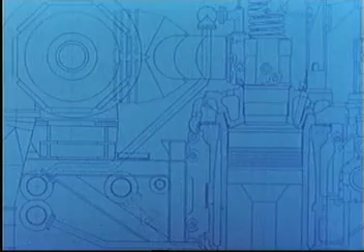The diesel engine propels half the tonnage of all the world's shipping.

Given good care, the diesel engine provides a maximum of effect on a minimum of oil consumption. The engineer will see to that. At the moment, he's checking the temperatures of exhaust and cooling water.

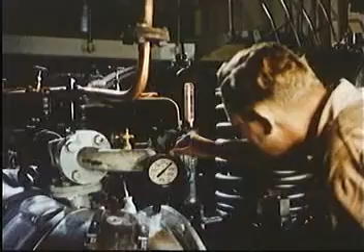His routine inspection takes him further down to the second platform with the intercoolers for charging air.

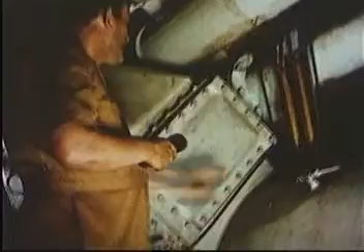Now he reaches the bottom, where his flashlight reveals the return piston cooling oil behind the sight glasses.

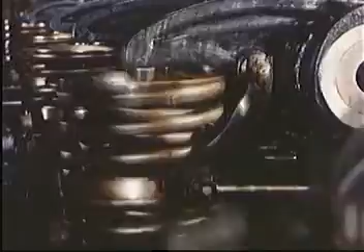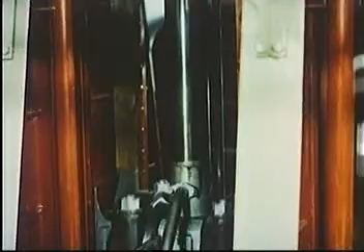To make a further study of the diesel engine, we leave the engineer and his instruments and put sight glasses on the engine from top to bottom. This reveals the movable parts: pistons, piston rods, crossheads, and connecting rod and crankshaft.

This sectional view shows the function which the most important parts of the engine have to perform.

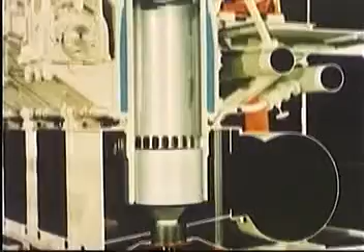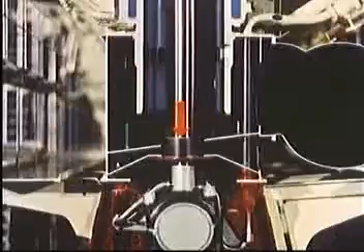In the upper part of the cylinder, an amount of fuel oil is burnt, which causes the temperature, and thereby the pressure, to rise in the combustion space. The gas pressure acts on the piston, from which the force is transmitted through piston rod and crosshead to the connecting rod, and results in a torque. The thermal energy has been converted into mechanical energy.

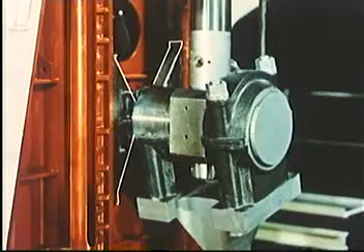In an arbitrary piston position during the working stroke, the crosshead is exposed to a vertical force from the piston rod and a force in the direction of the connecting rod, which together result in a horizontal force. This horizontal force must be transmitted to the engine frame, and for this purpose, the crosshead is provided with slide shoes supported on vertical surfaces, the guide faces on the engine frame.

Powerful forces are at work in a big marine engine, and accordingly, the engine parts are of big dimensions. In the workshop, with people providing a natural yardstick, one receives a good impression of their size. So big must the crosshead slide shoes be in order to transmit the horizontal forces.

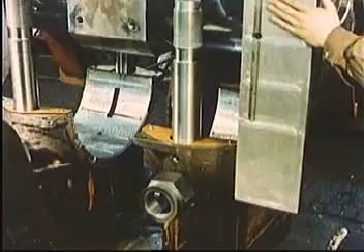The high points in the connecting rod bearing, which have been spotted by the contact with the crosshead pin, are scraped off in thin chips.

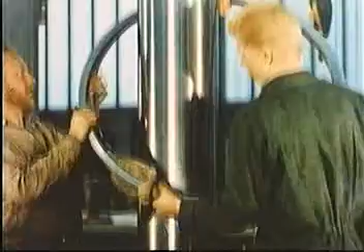To provide tightness against the high pressures, the piston is fitted with piston rings. The ring is fitted by a special tool which imparts an evenly distributed bending moment to it, thus preventing the danger of a permanent deformation.

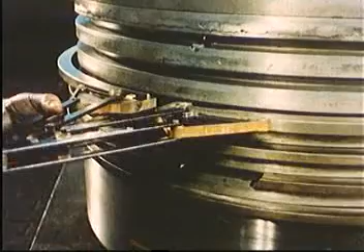The cylinders are not easily overlooked either. The scavenge air ports are bored oblique to a diametral plane to set the scavenge air in rotation.

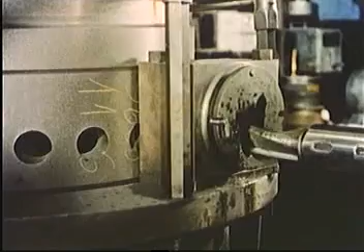The crankshaft is so big that to facilitate manufacture and installation, it's made in two halves, which are bolted together later. Each half is built up from a number of individual parts: main bearing journals, crank webs, and crank pins. The crank webs are provided with counterweights.

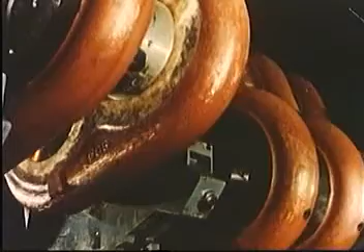Let's look a little closer at the principle on which a two-stroke engine works. Fresh air is supplied by a blower. From the blower, it's conducted in a pipe along the engine to the scavenge air space around the cylinder.

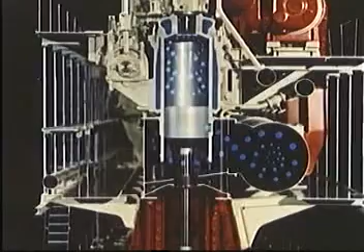When the piston approaches the end of the downstroke, the exhaust valve opens, the scavenge air ports are uncovered, and fresh air flows up through the cylinder. Exhaust valve and scavenge air ports are then closed, and during compression, the air is heated for ignition of the injected fuel.

The combustion increases the temperature and thereby the pressure which drives the piston. The exhaust valve opens, the pressure falls, and the combustion products are expelled. The air is again compressed. Fuel is injected, ignited. The gases expand. The exhaust valve opens, then the scavenge air ports. The cylinder is scavenged, and the cycle is repeated.

The power developed by an engine depends on the pressure events in the cylinder. The pressure events can be recorded by means of an indicator connected to an outlet from the combustion space.

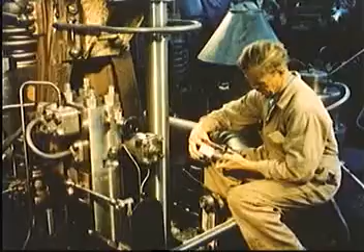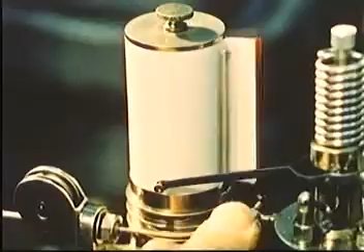The pencil is now moving in time with the pressure variations inside the cylinder. The drum carrying the paper is connected to the drive from the engine piston, its motion proportionate to the piston motion. The pencil records the pressure events during an engine cycle.

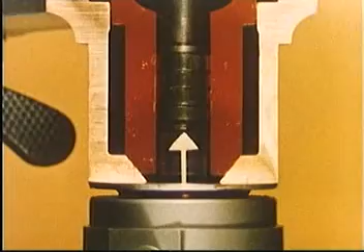The construction of the indicator is simple. Through a duct, the gas pressure is transmitted from the combustion space and acts on the indicator piston moving inside a small cylinder. The motion is resisted by a spring. This spring is exchangeable so that it may be adjusted to different pressure ranges.

The motion is communicated to a lever at the point of which a pencil is fastened. The pencil is pressed against a drum moving back and forth with the up and down motion of the engine piston. Thus, a curve is traced which shows the relation between the gas pressure in the engine cylinder and the position of the piston.

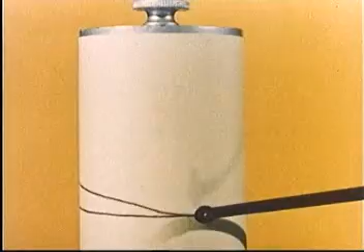The output of an engine is dependent upon the relation between pressure and volume in the cylinders during compression, combustion, and expansion.

For each separate cylinder, the indicator traces a curve, the so-called PV diagram. The diagram shows that the pressure is almost equal to the scavenge air pressure when the scavenge ports are uncovered.

The exhaust valve and scavenge ports are then closed. The air is compressed, and when the fuel is injected and ignited, the pressure will rise rapidly and remain at maximum during continued injection. After injection, the pressure in the cylinder falls to exhaust pressure, and during the exhaust period to scavenge air pressure.

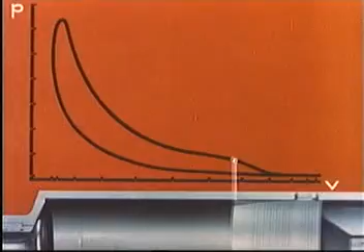Scavenging, compression, combustion, expansion, exhaust, and back to scavenging.

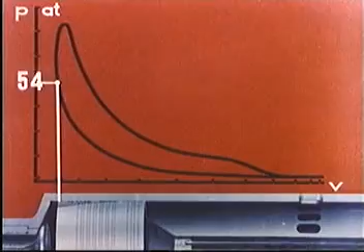The characteristic pressures are approximately a compression pressure of 54 kilograms per square centimeter, maximum pressure 66, exhaust pressure 8, and scavenge air pressure 1.75 kilograms per square centimeter.

From the indicator diagram, the indicated output may now be computed. At an arbitrary position of the piston during the compression stroke, there is a certain pressure, P, acting on the piston top. If the piston travels a short distance further, corresponding to delta V, and if we ignore the minimal change in pressure, the amount of work done, delta A, will be given by the pressure multiplied by the change in volume, or P times delta V.

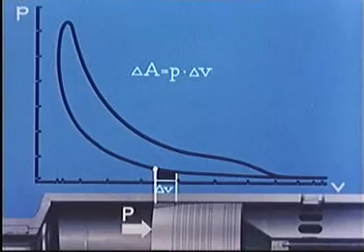This work is represented by the area below the part of the compression line corresponding to delta V, and the same applies to every single part of the compression curve. That is to say that the whole area below the compression line represents all the work that the piston must perform to compress the air in the cylinder.

During the expansion, the piston pressure acts in the same direction as the piston is moving, so therefore the piston receives an amount of work, and it will be seen in the same manner as before that the amount of work received is represented by the area below the expansion curve.

The amount of work transmitted to the piston during a full engine revolution must therefore be the difference between that delivered during the compression and that received during the expansion. In other words, it is given by the area between the curves. Thus, A equals sigma P multiplied by delta V.

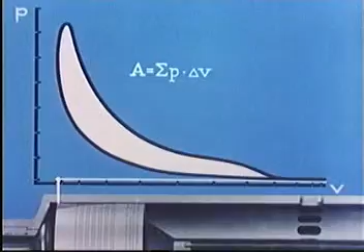One could imagine the same area being produced by a compression stroke under atmospheric pressure and an expansion stroke with a constant pressure on the piston. This constant pressure, Pi, the mean indicated pressure, can be determined so that it gives the same area as in the actual diagram.

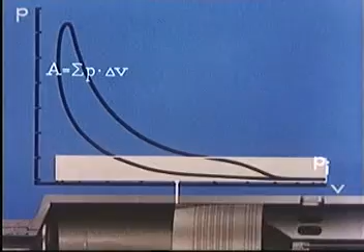In calculating the power, it is a great advantage to have to reckon only with a constant Pi during the expansion stroke, instead of the actual varying pressures in both the compression and the expansion strokes.

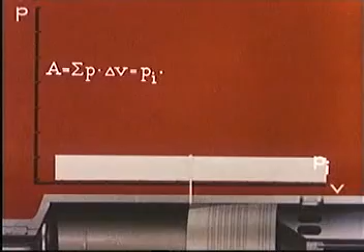The work in kilogram centimeters for one revolution will thus be A equals Pi multiplied by Vs, where Vs is the full stroke volume in cubic centimeters, and Pi the mean indicated pressure in kilograms per square centimeter.

There is one working stroke in each revolution, so if we multiply by the revolutions per second, n over 60, we get the work in kilogram centimeters per second, that is to say the power.

Instead of Vs, we substitute the piston area multiplied by the stroke length, that is pi over 4 multiplied by d squared multiplied by s cubic centimeters.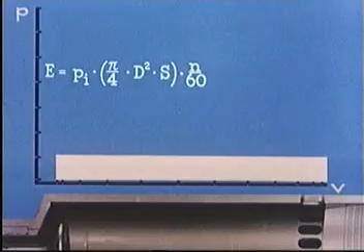To arrive at the output in horsepower, 75 kilogram meters per second, we have to divide by 7,500, and we thus have the equation for computing the horsepower developed in each cylinder of the engine.

To take an example, an engine with a Pi of 9.5 kilograms per square centimeter, a piston diameter of 84 centimeters, a piston stroke of 180 centimeters, running at 110 revolutions per minute, will have an indicated output of 2,300 horsepower per cylinder.

The largest force acting on the piston is the highest combustion pressure less the atmospheric pressure on the underside of the piston multiplied by the piston area, or 65 multiplied by pi over 4 multiplied by 84 squared. That is 360,000 kilograms.

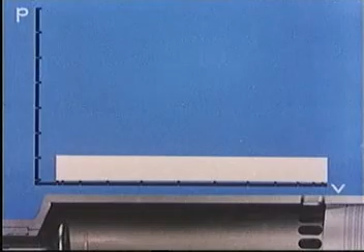The indicator diagram may also form the basis for computing the temperatures in the cylinder.

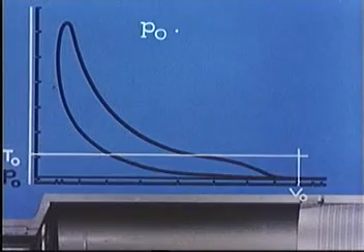Just after the scavenging, at the beginning of compression, the temperature is TO, the volume VO, and the pressure PO. From thermodynamics, we know that the pressure multiplied by the volume divided by the temperature is constant for an isolated amount of air, which is the case here in the cylinder, independent of the position of the piston, so long as the valve and the scavenge ports are closed.

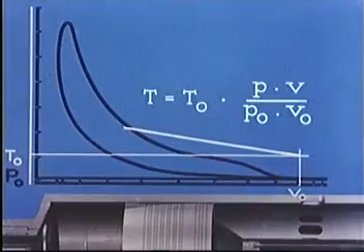The equation can be rearranged to express the temperature T direct for an arbitrary position of the piston. The indicator diagram gives us the values that are to be substituted in the equation when computing the temperature for the top position of the piston.

Substituting the initial temperature, 350 degrees Kelvin, the initial pressure, 1.75 kilograms per square centimeter, the initial volume, 950 liters, the pressure in top position, 54 kilograms per square centimeter, and the compression volume, 78 liters, we find the temperature to be 890 degrees Kelvin.

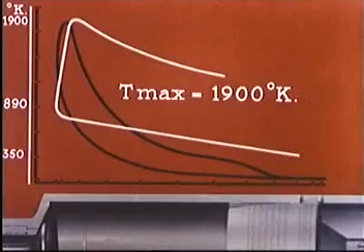The highest temperature occurs at the cessation of combustion. It is here found to be 1900 degrees Kelvin. In this way, the whole of the temperature curve may be calculated, right up to the moment when the exhaust valve opens. To get a better idea of what is happening, we will measure in degrees centigrade instead of degrees Kelvin.

Already during compression, the temperature reaches the melting point of lead. During the first part of the combustion, the temperature reaches the melting point of aluminium. Shortly after that, the temperature reaches the melting point of cast iron. The high temperatures in the cylinders even exceed the melting point of steel.

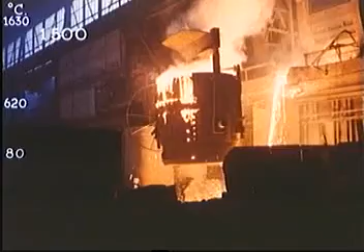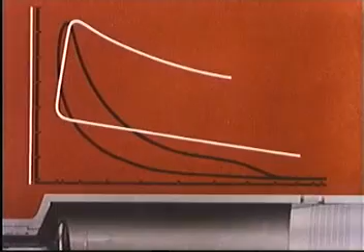Combustion takes place so quickly, however, that there is not time for the high temperatures to be transferred to the cylinder wall. The temperature of the metal surfaces will not exceed the mean temperature of the process, about 620 degrees centigrade. Then again, the cylinder is made of cast iron, which begins to lose its strength already at around 300 degrees centigrade, besides which the lubricating oil will lose its lubricating ability if it becomes too hot.

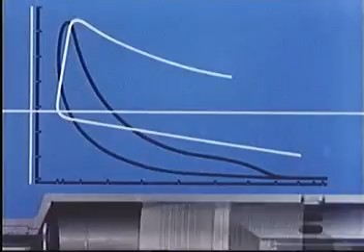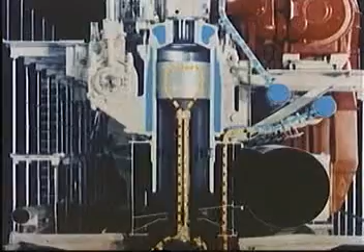It is therefore necessary to provide efficient cooling, partly with oil or water led through the piston rod up into the piston itself, and partly with water circulating through the cooling jacket around cylinder and cylinder head. If a cooling water temperature of about 70 degrees centigrade is maintained, we can prevent the temperature on the inside of the cylinder wall from exceeding 300 degrees centigrade.

This is possible because there is a drop in temperature as the heat passes from air to metal. The gas molecules are in violent motion inside the cylinder, but out near the wall they are slowed down and form an insulating layer. This causes a rapid fall in temperature at the boundary between gas and metal. Through the wall itself the temperature falls evenly, but as the heat flows into the cooling water, there is again a sudden drop in temperature owing to the retarded motion of the water molecules in contact with the wall.

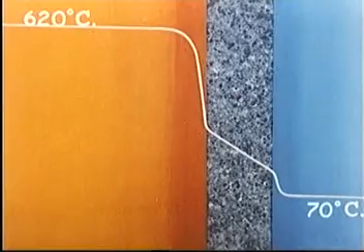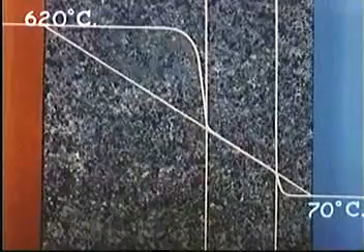The mean temperature of the gas is 620 degrees centigrade, and the cooling water is kept at 70 degrees centigrade. It is possible to calculate a thickness of iron that offers the same resistance to heat flow as the boundary resistance between air and cylinder wall, and similarly a thickness of iron that corresponds to the boundary resistance between cylinder wall and water. As the drop in temperature through the entire homogeneous iron wall will occur evenly, the temperature of the original cylinder wall can be determined.

These temperatures, which are calculated for the hottest point in the cylinders, explain why the materials are able to withstand the high combustion temperatures.

The indicator diagram shows that the combustion in the cylinders occurs within a fraction of the time of a revolution. Within this fraction of a second, defined by the flashes, 50 grams of oil must be burned.

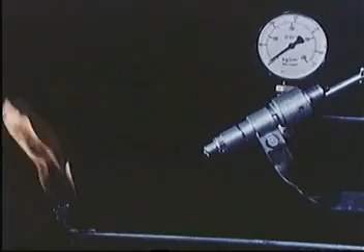A strong atomization of the oil is a condition for the short time of combustion. Without atomization, the oil will not ignite at all, even though the stream passes right through a flame.

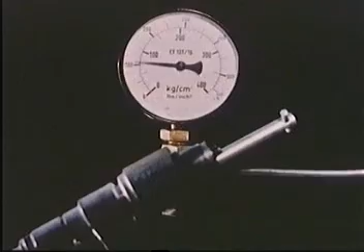If the pump pressure is raised to 80 atmospheres, the oil is more finely atomized, but not enough to ensure reliable ignition. At a pump pressure of about 200 atmospheres, the atomization is so good that all injections are ignited.

At the same pressure and continued injection, a flame is formed. But the flame soon dies out owing to lack of oxygen. Not until air is admitted through the pipe in the lower part of the picture can the flame be kept burning.

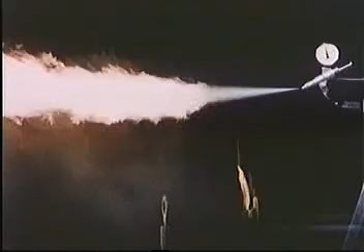The flame is formed some distance from the nozzle. The distance between nozzle and flame is about 4 decimeters. This corresponds to an interval of 1/400th of a second from the start of injection to the start of ignition, the delay period. In the hot engine, the ignition delay is approximately half.

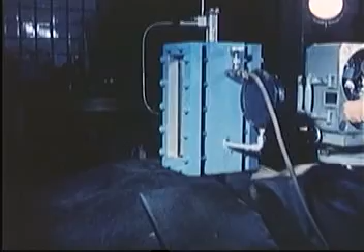An experimental setup with a pressure chamber and a high-speed film camera taking 3,000 pictures per second will show the dependence of atomization upon the friction between oil droplets and air molecules.

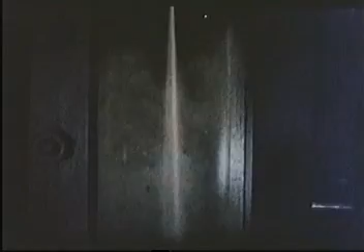First, a vacuum is created in the pressure chamber, and the high-speed camera shows the appearance of the stream before it hits the bottom of the chamber. Then the vacuum is succeeded by a pressure of 3 atmospheres, and the high-speed camera registers the stream, which now has smaller droplets and a wider spray angle. The friction with the air molecules will be greater and atomization better when the oil is injected under high pressure.

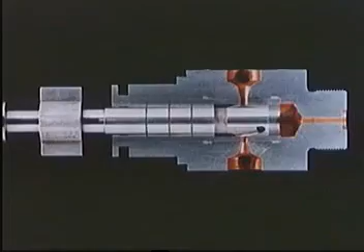In the diesel engine, the pressure is produced by a fuel pump. The oil is taken in through a ring chamber, from where it is drawn out into the pump barrel, connected by a hole in the front of the plunger to a milled-out recess in the plunger.

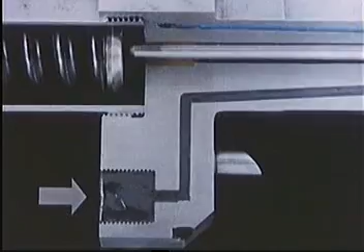The oil flows from the pump through a filter to a closed duct in the fuel valve. A heavy spring presses on the needle valve, which bars further access to the nozzle. The rise in pressure begins when the plunger has closed the inlet port.

The oil presses on the conical end of the needle valve, lifts it a trifle, whereby the pressure area is increased and the needle snaps up. The oil now streams out through the nozzle holes at a very high velocity, resulting in a fine atomization.

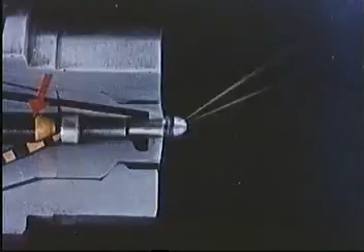When the helical groove of the plunger passes the inlet port, the oil may flow freely back into the ring chamber during the continued movement of the plunger. The moment the plunger uncovers the inlet port, the oil pressure falls and the valve spring snaps back, pressing the needle into its seat so that it shuts off access to the nozzle.

The helical groove on the plunger makes it possible to regulate the amount of fuel. If the plunger is turned in one direction, the useful stroke of the pump will be increased. If turned in the opposite direction, it will be reduced.

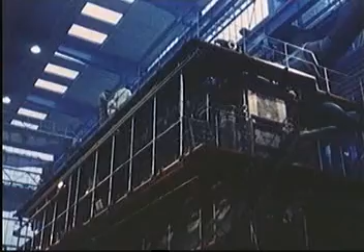Not all the energy contained in the oil results in mechanical work. The process incurs losses. The losses may be localized by drawing up a heat account, a heat balance, for instance, for this engine, which is erected on a test bed and provided with the necessary measuring instruments. The engine is receiving a final checkup and adjustment.

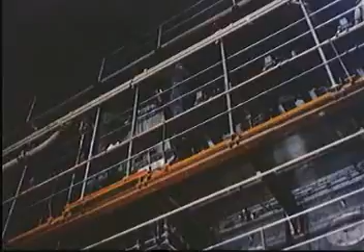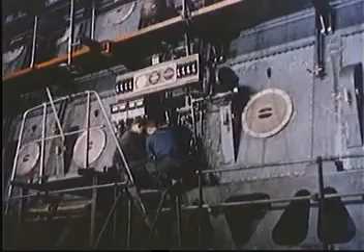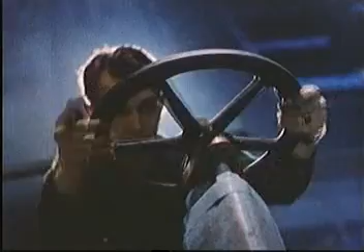Before the engine is started, cooling water and oil are turned on. Also, compressed air is needed for the starting.

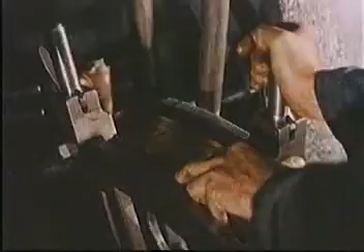The control lever is moved, regulating the fuel pumps for increased injection. The speed of revolution is rising.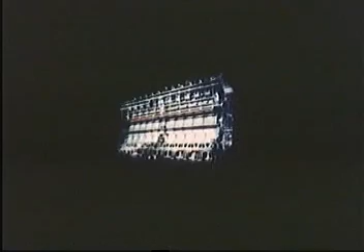Let us imagine the engine as being isolated in a box. The energy admitted to and rejected from the box is ascertained for use in the heat balance. Whatever else happens inside the box is irrelevant to the heat balance.

Energy is admitted from the fuel tank in the form of fuel oil. Thermal energy is carried away by the heated cooling water. Thermal energy is also carried away in the hot exhaust gases. And mechanical energy is absorbed by the dynamometer.

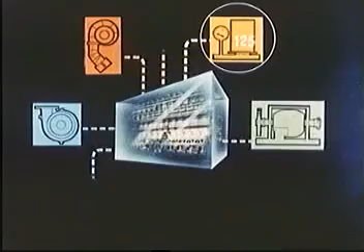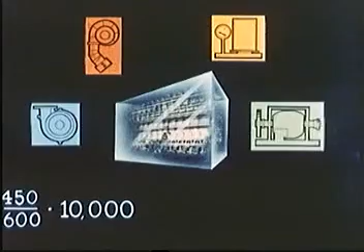If by weighing we find the amount of oil consumed in 10 minutes to be 450 kilograms, we are now able to calculate the thermal energy admitted per second. It will be 450 kilograms divided by 600 seconds multiplied by the calorific value of the oil, 10,000 kilocalories per kilogram, giving 7,500 kilocalories per second.

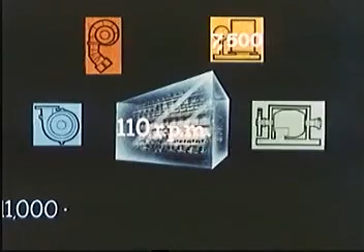The energy produced is determined by the speed of the engine, 110 RPM, and the brake torque registered on the dynamometer as 111,000 kilogram meters. The power will be the torque multiplied by the angular velocity. To obtain the result in kilocalories per second, we divide by 427. The result is 3,000 kilocalories per second.

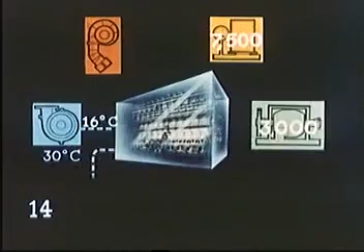The energy carried away by the cooling water is determined by the temperature rise, 14 degrees centigrade, multiplied by the quantity of cooling water, found to be 123 kilograms per second, that is 1,720 kilocalories per second.

In a similar way, the energy discharged with the exhaust gases is calculated from the rise in temperature, the amount of air, and the specific heat, and found to be 2,700 kilocalories per second.

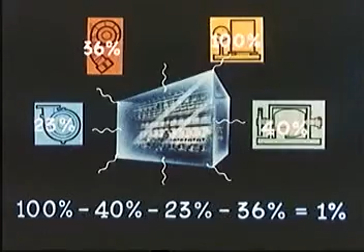A clearer picture is obtained by converting the figures into percentages of the energy admitted. Drawing up the account, we see that there is a discrepancy of 1% on the loss side. This loss of energy is ascribed to the radiation of heat from the engine, which we have not been able to measure, plus unburnt constituents in the exhaust gas.

It will be seen that the efficiency of the diesel engine is about 40%, which is more than can be attained with any other type of heat engine.

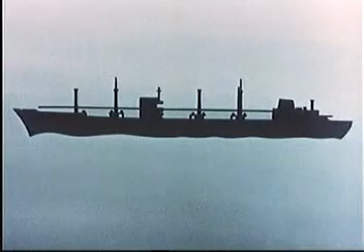The efficiency is a deciding factor in how far a ship is able to sail on a certain quantity of fuel. If a diesel motor ship can sail 2,000 nautical miles, a steam turbine ship will sail 1,500, and a ship with gas turbine 1,000 nautical miles on a given quantity of fuel.

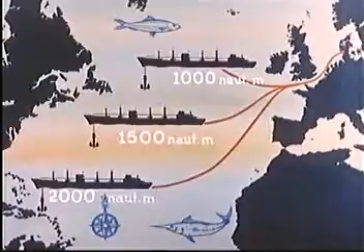The engineer is still on his job, securing a long life for his engine by checking and testing. And one thing more, by knowing the meaning and function of every little detail of his engine.